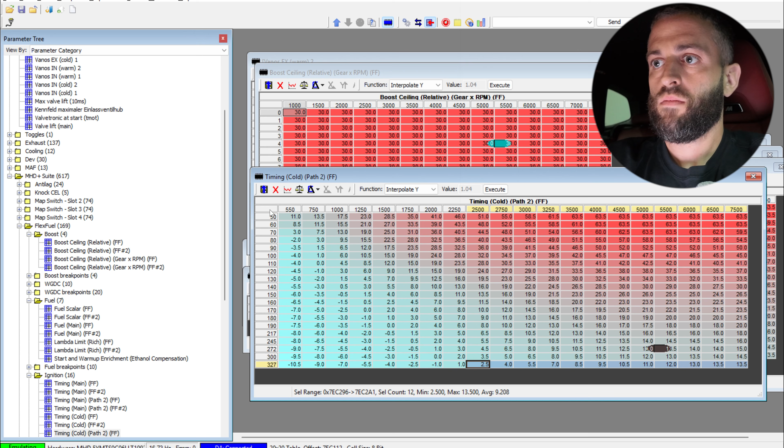So just to show you guys how this works with no changes to my current tune, right, so we have a baseline. We can also show you guys a little bit of data log understanding in a minute, but just tuning wise, it makes 710 wheel horsepower, 30 pounds boost, 679 wheel torque. While the car's slowing down, I lost one of my lights. Normally going in one of these cars, like, okay, I'm at 210 load and I'm dropping to 180, right?

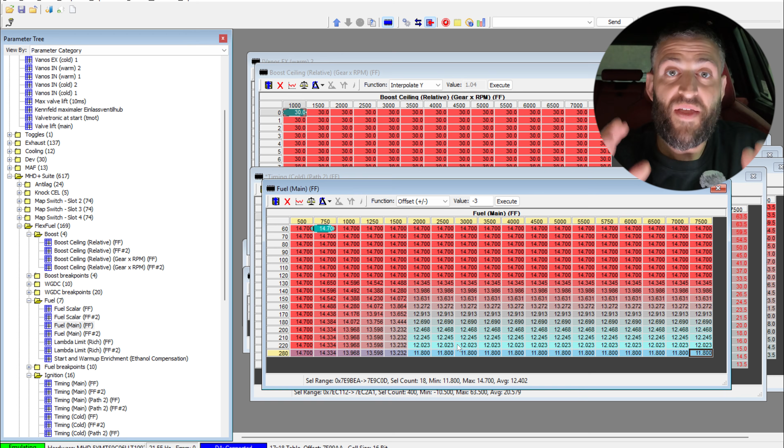For example, we're gonna take this whole table and pull 3 degrees of timing out, right? This is ignition timing, we're starting here. I know the fueling's good, I'll show you the fueling target though. I guess this car runs about 12 air fuel in this range. At higher horsepower, it goes to 11s air fuel wise. Most people will say it's too rich for direct injection motors, but fueling wise, on high boost has to be about 25 pounds boost on 85.

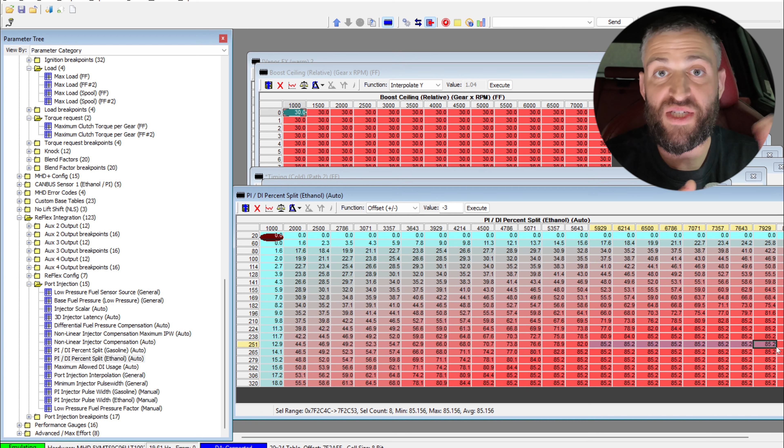85% of my fueling on high RPM is port injection only. This car from the factory has port injection and direct injection. We're gonna start off by saying if you're direct injection only, you run a hair leaner, low 12s. If you're port injection and direct injection on this engine or any BMW engine, you have to run the car very rich. There will be people that dispute me, and none of them have records like 7-second G80s and stuff like that. Anyone that runs these cars lean with port and direct injection is asking for a failure.

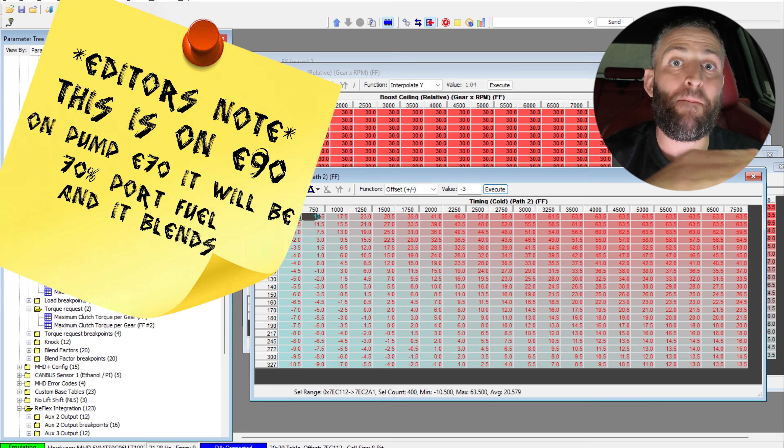With that note, I run 85% of my fueling on port injection over about this power level. My fuel target is 11.8 air fuel at about 800 horsepower on, below that it's about 12s, right? And I stopped the scaling of my tables at about 800 wheel horsepower for fueling target because I'm targeting the same thing. My G80 runs about 11.5 air fuel, 11.3 air fuel at about 1000, 1100, 1200, and I go a hair richer past that. So the fueling, that's what I run.

In terms of how to adjust the fueling, it's a whole other discussion. Ignition timing wise though, we're gonna take the base timing table I just ran, we're gonna pull 3 degrees of timing out. I'm gonna copy and paste it, and I'm gonna show you guys why MHD is king. I can adjust these tables in real time.

As I rev this car, it shows you where you are on the table. Showing you where you are is not that important if you have a matching data log, but for your guys' sake and me showing you how to tune is amazing. If you're on the street and you're trying to do this, you can't see ignition timing versus horsepower or cam timing, which I'll show you with a crazier concept, but I'm on a dyno, so I'm gonna show you guys pulling 3 degrees of timing out should lose power before I even do a dyno pull.

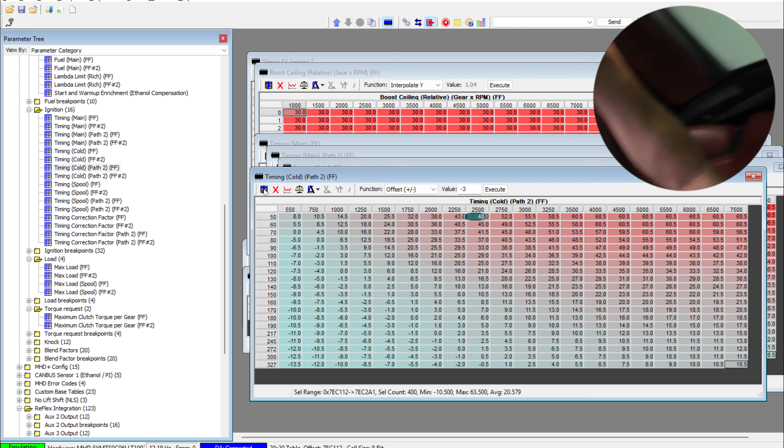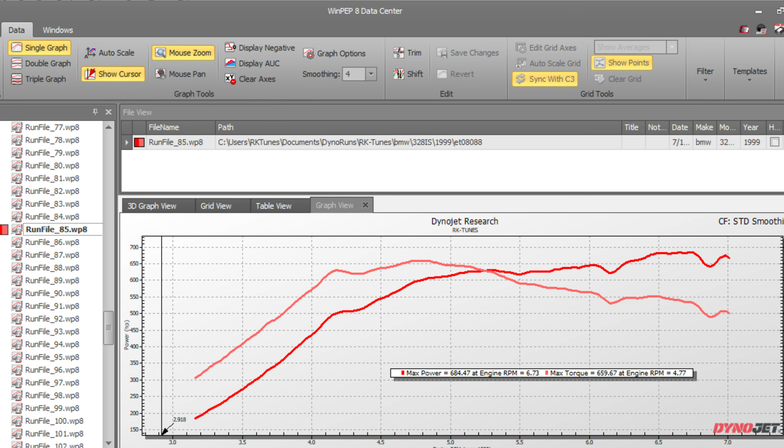Something to notice to make sure your data log's doing what you want: if you try adding 2 degrees and the data log shows the same base timing and nothing else going on, you could have other issues in your tuning. Mine's sorted though, so everything I tell it to do, it does. Spicy with the port injection. Up top, I lost about 30 horsepower, which is about what you want for 3 degrees.

Just for reference, this might sound a little sketchy, but we're at low boost. We're gonna add the 3 degrees back into the table, and we're gonna add 2 more. Someone watching this might say, just add 5. You're right, I should've just added 5, but it's okay, because then we're gonna paste it here, and just for reference, it's about 5. I should be pasting and hitting upload.

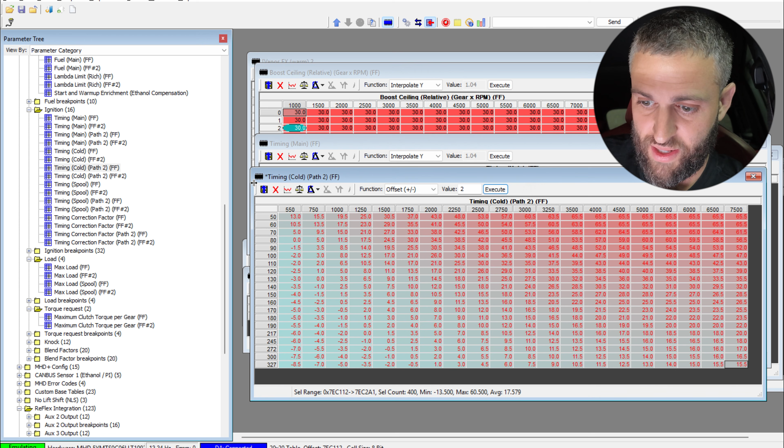I don't know why I don't, but whatever, upload. And this is live, guys, this is a brand new car with live tuning. It's crazy. If you're a DIY guy, this will let you advance so much more quickly because you can just try things. Normally each flash takes about 10-15 minutes, and MHD says it takes 30 seconds. It does, but emailing from my laptop to my phone, flashing, etc. I need to let the car warm up every single hit normally. I really don't have to. It's 95 degrees in this room, and you'd still normally have to let it warm up every time you flash. I get just 2 hits.

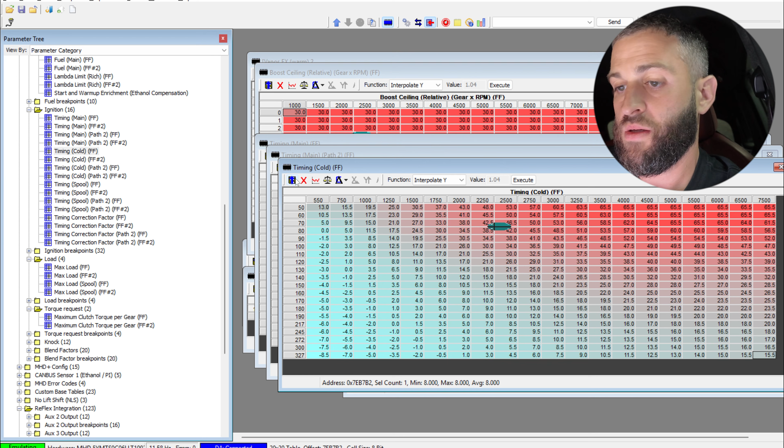This is plus 2 degrees. I'm not scared because I'm a soft tuner. I make 1,000 horsepower being soft, but I make sure the setup's good. It'd probably make like 5, 8 on the wheels. I'm so good, it made 714 wheel horsepower. It made 5 wheel horsepower, 10 wheel torque gain.

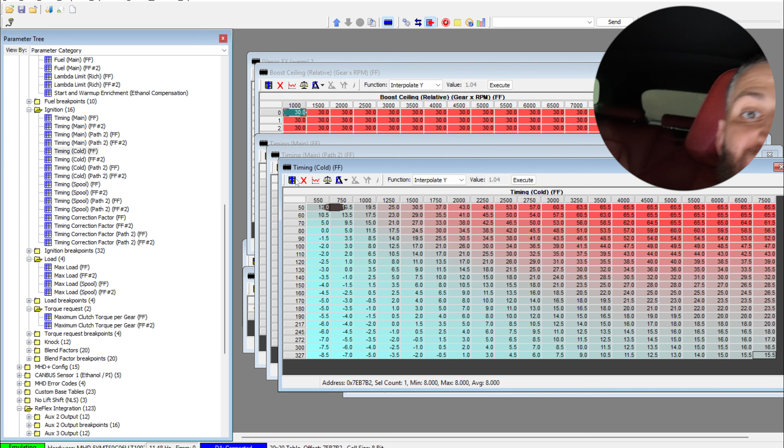A lot of people would say keep going, keep going till it stops making power. The way ignition timing works, there's gonna be really good tuners watching saying, Jordan, you're plus 3 degrees, that's a little too much timing. We'll get there. Every degree of timing should be worth a substantial amount of power. If you pull 1 degree, you lose 10, pull another degree, lose 10, pull another degree, lose 10 - it's normal.

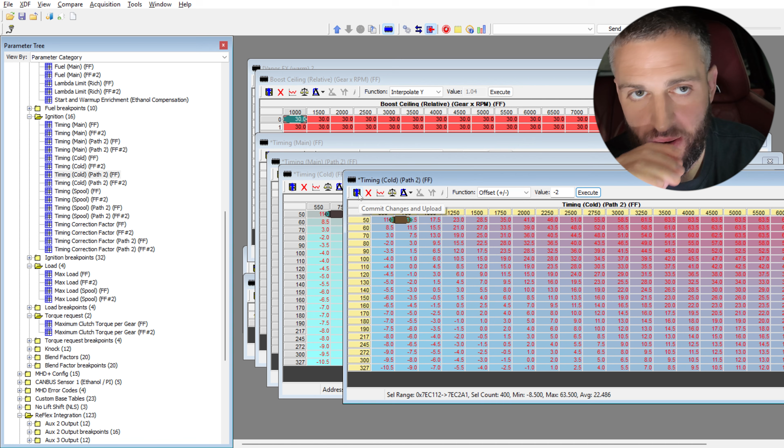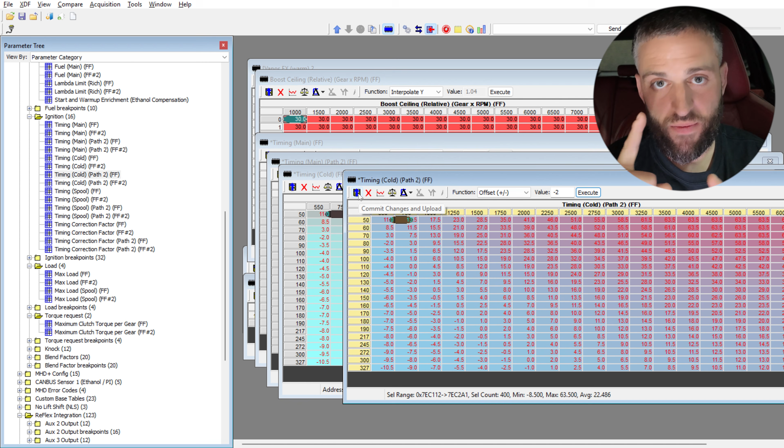Add 2 degrees timing, you gain 20 horsepower. When you gain only 5 horsepower, then you gain 3 horsepower, then you gain 0 horsepower, it's actually not that you're closer to what's called max brake torque. What it typically means is that when you gain 10 horsepower per degree, let's say, and you do it again, you only gain 5 - what that actually means is that half the cylinders lost power and half gained.

Then you do it again, and you'll actually potentially have 1 or 2 cylinders gain. Let's say 2 cylinders gain and 4 cylinders lose. Do it again, and you'll have all cylinders at an even point. So what happens is that's actually a huge negative. You should add timing until you have diminishing gains - so you're losing, or you stop gaining as much.

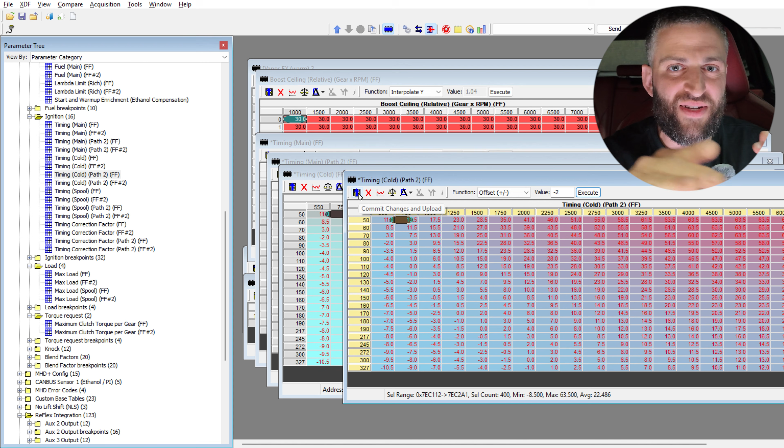Here, the reality is I probably should leave it between the 684 and the 710, probably, not exactly this. And I will make a note of it on my phone where I make all my notes. I usually transfer to my computer after, and I have great notes for people, but because I'm screen recording, I'm not gonna do it right here. I'll review that data log.

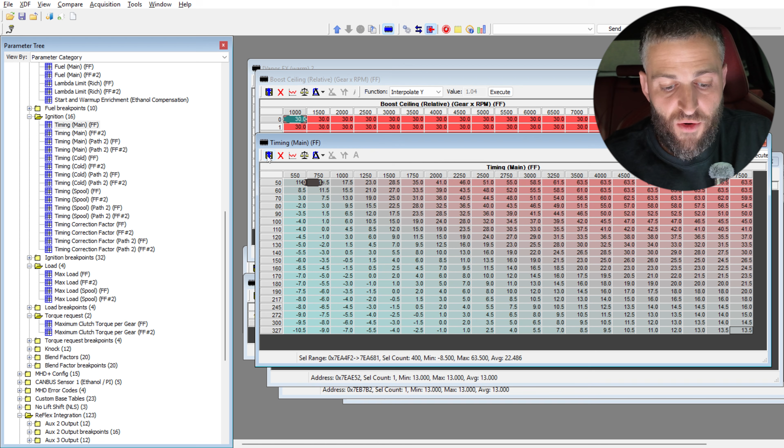You remote tune the car on the street, and your tuner adds more and more timing until I don't know where the hell they stop. So you have stock G80 M3s running 20 degrees timing, 18 degrees timing. I find 15-ish degrees the maximum safe point. You might have another tuner that makes 20 horsepower more than me at the expense of your engine at some point.

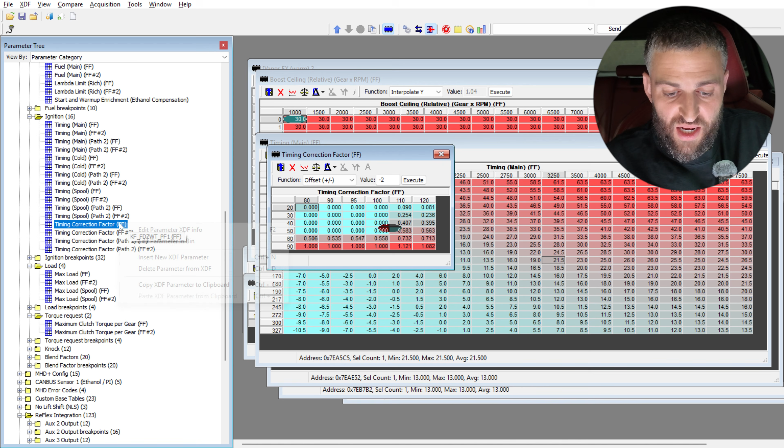That's a basic breakdown of ignition timing and how I do it. There's also compensations, which I'll show and share with you guys. If you see right here, the axis is intake air temp on the left-hand side, and the top right here is coolant temperature. So this actually means that in this coolant temperature range, the car is gonna start pulling power. I'm pretty sure, don't call me dumb, but I think it's like a multiplication on this versus something like this, and at a 1, it will pull that amount.

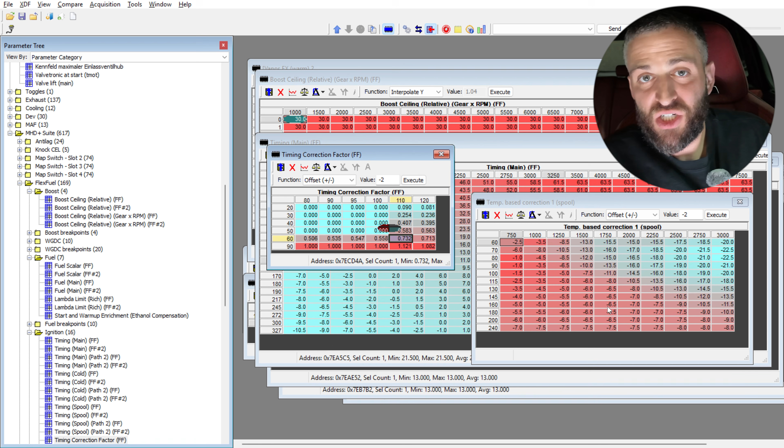I'm not 1000% sure. I leave the factory super soft with this, so I'll typically make it 0 where I don't want it to pull any power out or ignition timing, and I go right to stock values within about 10 degrees coolant temp wise and about 10 degrees air temp wise. I'm okay with it if it gets too hot, pulling out a bunch of power. Right now it's gonna pull a hair, but it's 92 degrees in the dyno room. The air temp of the last dyno pull was 120 degrees. So timing wise, that's how I do it.

What I'll typically do is, let's just say, it's a bad example. Let's just say this row is 20 pounds of boost. It's pretty close. I'll actually go to this row, which I'll show on the screen, and I'll do this at a lower power level, and then I'll guesstimate all the way up. So I'll do the math like 20 pounds boost, and there used to be things online that say 1 pound is 1 degree. It's not possible, because if that was the case I'd be running like 0 degrees.

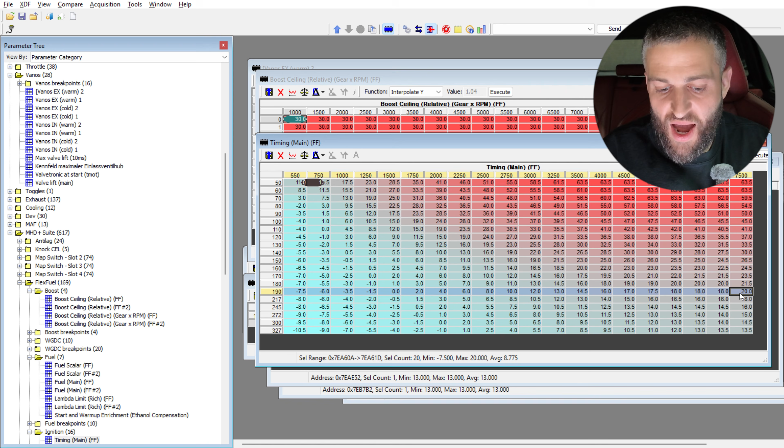I actually go from 20 to about 50. I'll pull out about 8 degrees of timing, let's just say 7 degrees of timing. That's just my math, it's a curve thing, it's not a straight line. I'm happy there, I tested at 40, I will go to 50. I never will add more based on my guesstimate.

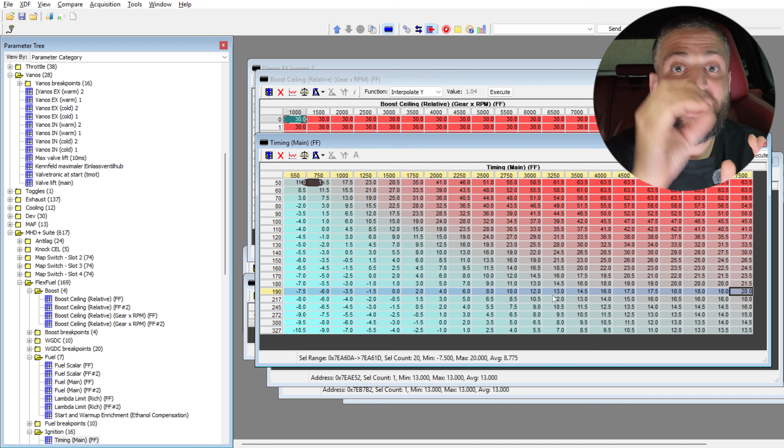I'll always subtract. So if I subtract, I see 10 down, I'm pretty happy, because if I do the math at 30 degrees, I do the math at 40 degrees, and I learned this: if I'm at 50 degrees, the chance of me needing more timing than expected is very low. I could actually potentially need a hair less. If I pull out a degree or two and I lose 0 horsepower, I'm fucked. I'm way past MBT. I fucked up, I'm gonna keep going down.

Doing this over enough time, I learn a safe window, and when I remote tune someone's car, I'll start 2 degrees, 3 degrees less than that, and that's sort of where they'll live at forever, unless I throw it on a dyno and add that back in for them. That's my idea on ignition timing.

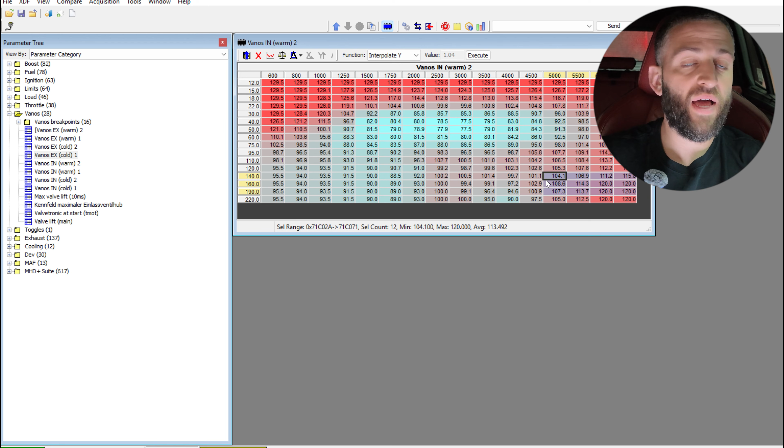It's actually the next day. Right now I'm playing with cam timing. Normally on a Chevy, you gotta take the whole motor apart. On a JZ, you have a cam bolt. On this engine, there are settings to change, and with MHD it is live. As you can see, we are data tracing, so I'm gonna show you guys exactly what does what.

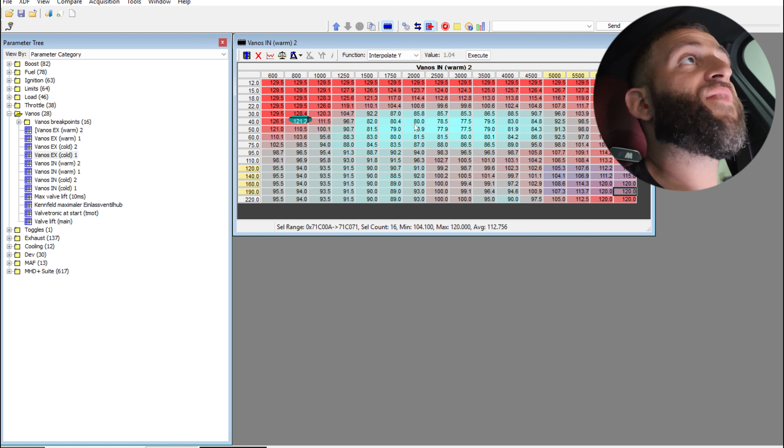Factory is about 112 degrees at redline on the intake cam. This setting right now I have is 120. I don't think this is gonna help with power, but we're gonna see. And then I just hit low boost, this 30 pounds boost, and we're gonna compare to the dyno sheet. We're not gonna look at the data log, other than I'm gonna verify the cams are moving correctly. If you're on pump gas, you could have different ignition timing being pulled, but we're on low boost, 30 pounds. With 85, the car pulls no timing, so it's not an issue.

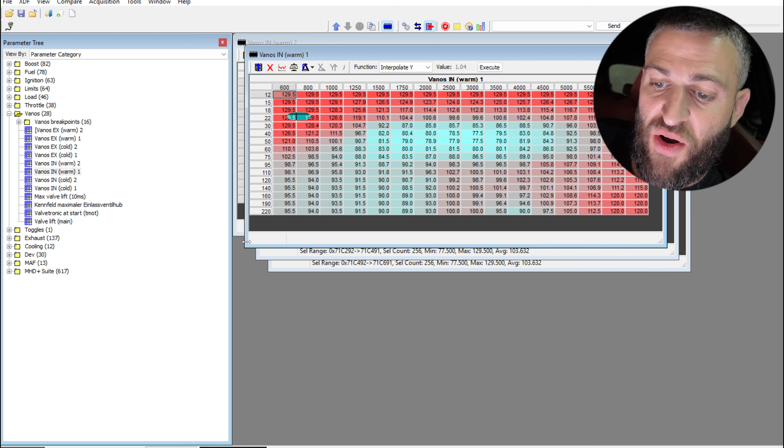736 horsepower. But to stock, we're gonna go back to stock for all the cam timing tables and see what it does. There's a problem with excessive heat, like I was dealing with yesterday, which was kind of why I quit, and I'm back at it right now. If your air temp goes up like 15 degrees or something, you might lose power when you actually did something beneficial and made the engine perform better.

So these are all stock. It's about 113 degrees at 6,000 RPMs. Quite interesting, 120 degrees up top made the most amount of power. That is extremely common on S54 cars and similar, where you have a great flowing cylinder head and good cams. It's not as common, I would say, on an engine like this.

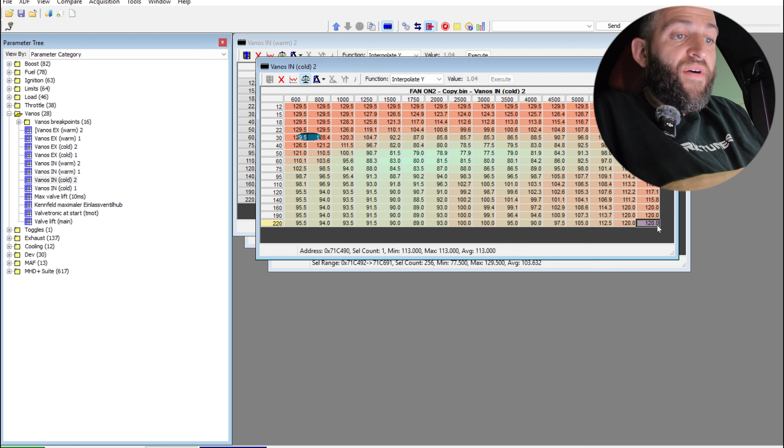To verify these gains, first we're gonna take this down. We're at 113 degrees up top, and we're gonna make it 105, then we're gonna blend this down. This is gonna have large power losses up top because it's going too far, okay? We'll just copy this over to the other tables. Upload. And I know I'm changing the values in the low RPM range, if anyone knows what's going on, and it can have misleading effects or whatever, but 99.

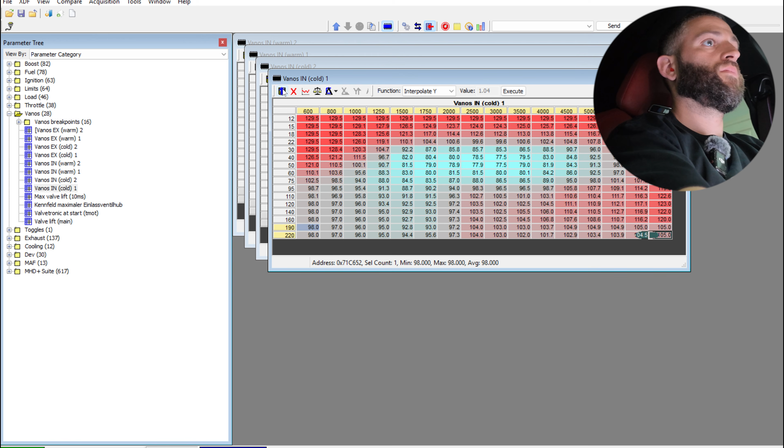And it made even less power. So we're gonna put it back to 120 degrees at redline, which I did not expect at all. I thought it would be in the stockish range, and you learn some things on some cars. I don't know if the compression of the engine has a slight difference as it works.

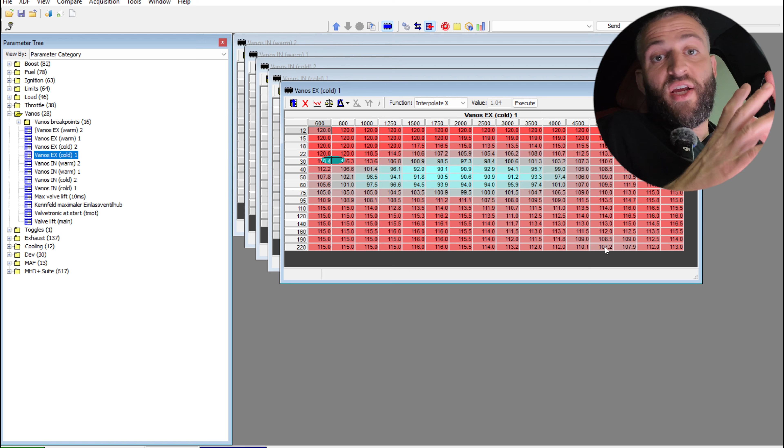Now, once we have the intake set up, the exhaust cam doesn't need as big of a split. Like this, in my opinion, this 107 on the exhaust cam is actually not needed. I think this can actually be made probably like 113 flat. And we'll do 114, and we'll try now on the exhaust cam doing the same thing. There might be someone out there smarter than me, better than me, that can tell me no, you need to do both of them combined, etc., to see the gains it has.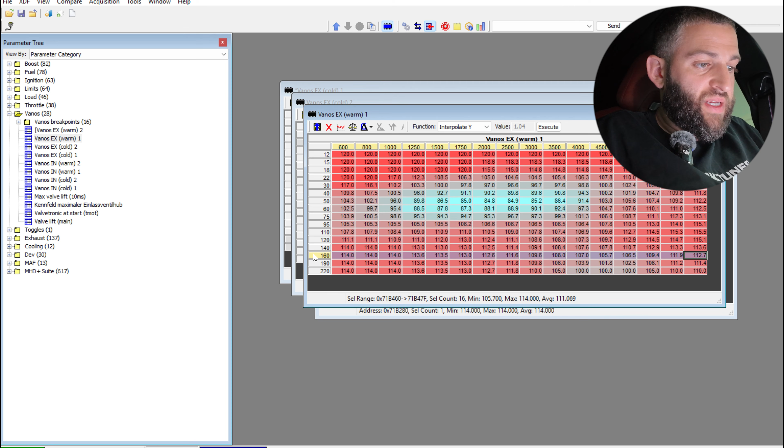The same when you shift both cams one direction, the other direction, it changes the power curve. I typically do one at a time. I've tried both independently before, and I've never seen a major gain from it. But what we will do is make the exhaust cam 113 flat, okay, and see what that does. Then we're gonna go to 105, then 120.

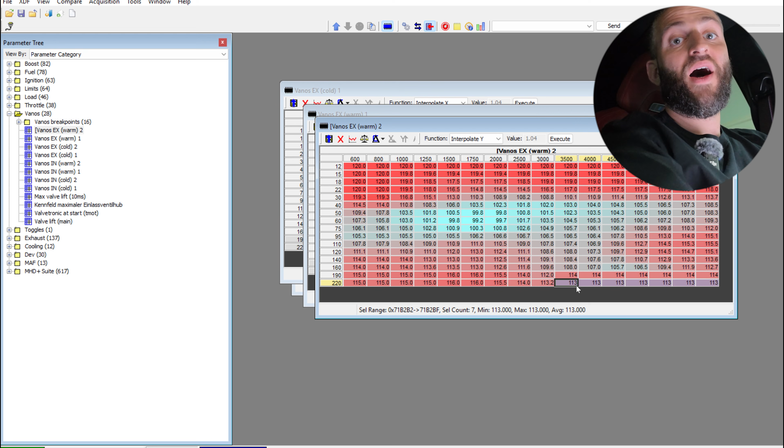The 120 exhaust cam is how people time it when you do aftermarket high pressure fuel pumps on B58s. It sucks. I could be wrong, but it's gonna suck. The intake cam makes more sense going to 120.

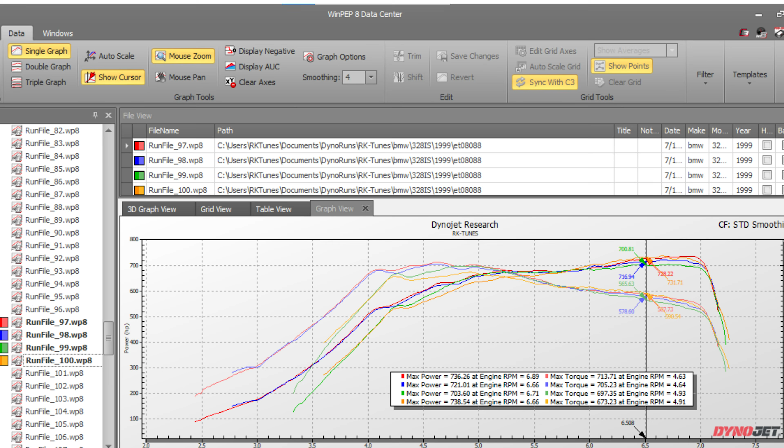That did nothing. I had small gains in this range where it went down a little bit before, and now it's flat. Now we're gonna go do, and mind you, when the car rolls up on boost, this load, it goes 0 PSI about here, and then it rolls through here. So this is really like when you're in boost. This still will have effect on spool up, and before I'm done, I'll blend all these values.

So now let's go to 107. Let's do drastic changes just to see. We'll do 3,000, hit 1, 2, 3, 4. Once again, this is not something I do in every car. I have a really good idea of where it works really good on these cars from doing it.

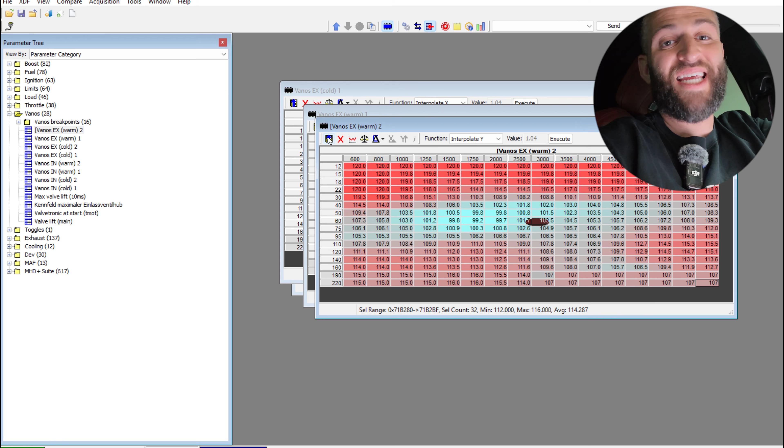Ignition timing is way more important for a dyno, because on ignition timing you can go too far and have no idea at all. The last pull for reference was 738. That actually made a little bit more power - it made 752. Cool, right? Now what we'll do is we'll actually go from this to 102 degrees.

And a 5 degree step is fucking huge, but I'd rather do this and know what's happening. Also, just for reference, that lost a bunch of power down low, but it made way more up top. So we're gonna, just for reference, go to 99, I guess, which is crazy. For me, I think it's a little crazy.

And then I'll show you guys the benefits of variable cam timing, because I can actually have it be one degree in the mid-range and a different degree up top. All right, 1, 2, 3, 4 tables, all done.

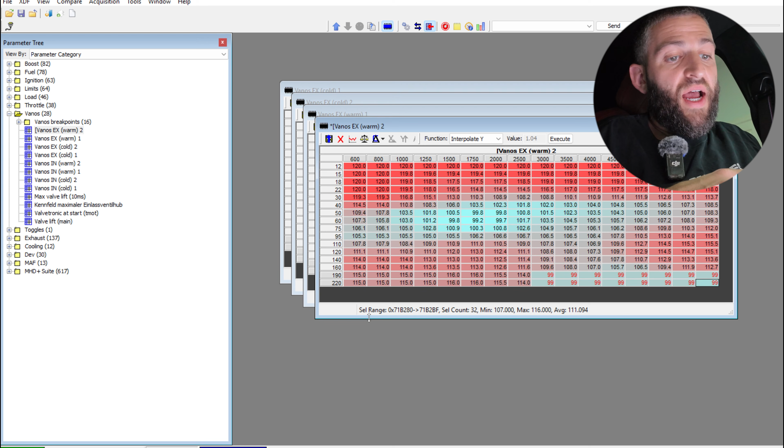Also, for MHD live tuning, for more information, I asked them if there's any information I could share with you guys to make this easier. They said read the book, the PDF. They said everything's a PDF. So even when I had problems on this, on the MHD stuff, I read the PDF and it made my life so much easier. My lighting is freaking bad, guys, I'm sorry. The lighting's horrible, but this is live tuning and how I do it.

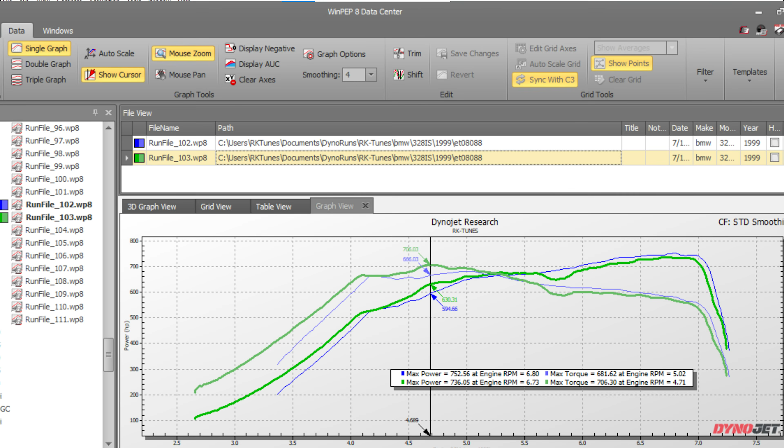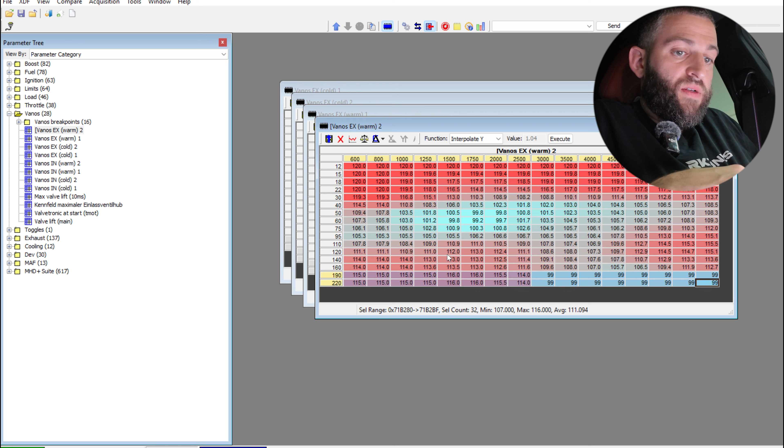Then made power past 5500, right? And we'll actually blend this down like this. Interpolate X, boom, interpolate Y. I don't really want to do that, but I guess I will.

For reference, I think this should actually be the same thing across the board, but I'm not testing extremely low power level, and it's not only gonna be like 10 pounds boost that much, so it's sort of irrelevant. Then we'll take this 120, and we'll go boom, boom, boom.

Right now I'm gonna let it cool off for a second because my air temp is very hot. So now from 5,500 RPMs on, I'm gonna have 103 degrees, and on the low end I'm gonna have less, because this is the RPM scale, right? Upload 1, 2, 3, 4.

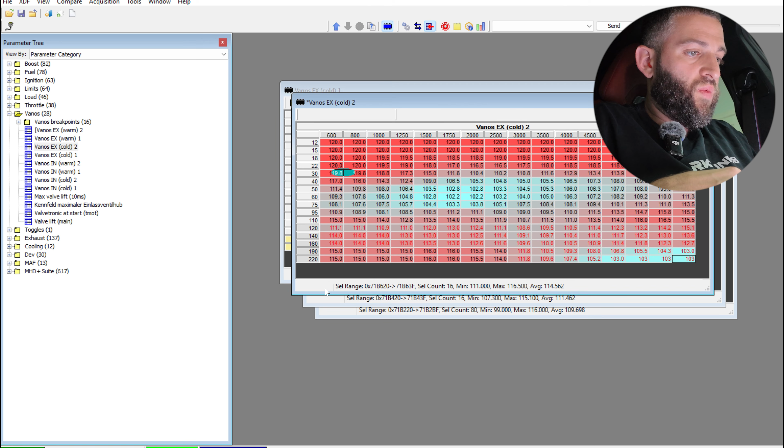And these tweaks I've just done, I don't know if you guys realize, I went from 700 wheel at 30 pounds of boost, pretty much, to 750 wheel.

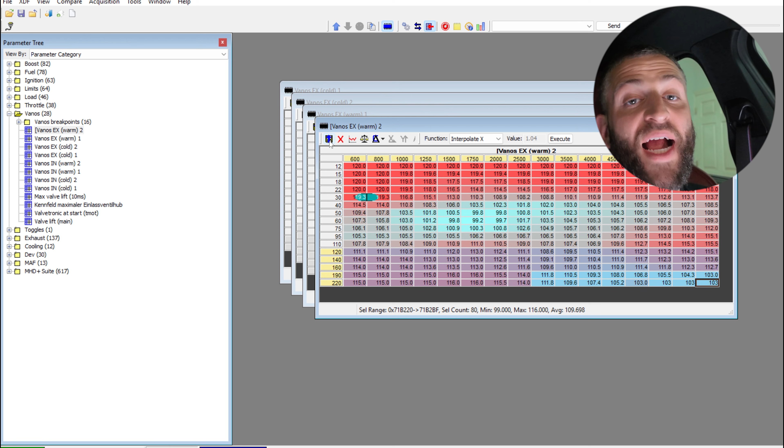People think that tuning a car, you're gonna be aggressive and run more and more ignition timing, and what I've shown you guys is I'm not. The ignition timing currently on this tune and this table is actually the lower ignition timing from me testing. I could add back in a few degrees and gain about 10 wheel, I think it was 15 wheel, and I could probably go a hair higher and find 20 wheel horsepower more at 30 pounds boost.

But in my opinion, that's the wrong way to do it - that's the aggressive way. Also, by doing cam timing tweaks like this, your changes at 20 pounds boost or 30 pounds are the same timing target, in my opinion, at 50. You have really high back pressure, it will tweak things slightly, but this is the way that I do it because I don't want to do 20 pulls at 50 pounds boost for the customer.

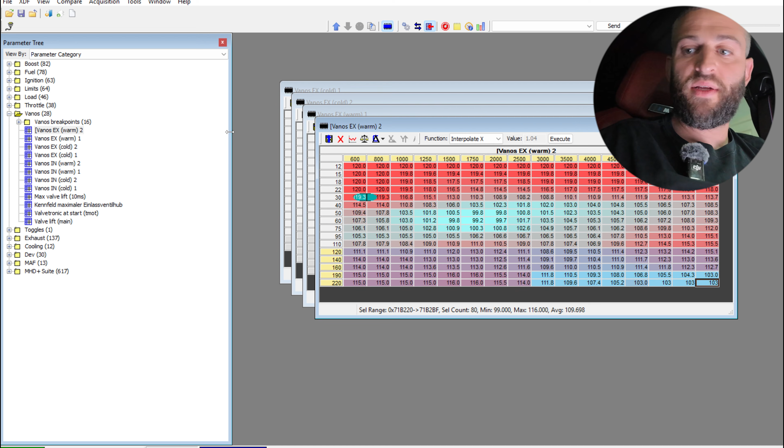Let me check my air temp real quick. Air temp's actually 108 and we're doing good, so I can keep moving now.

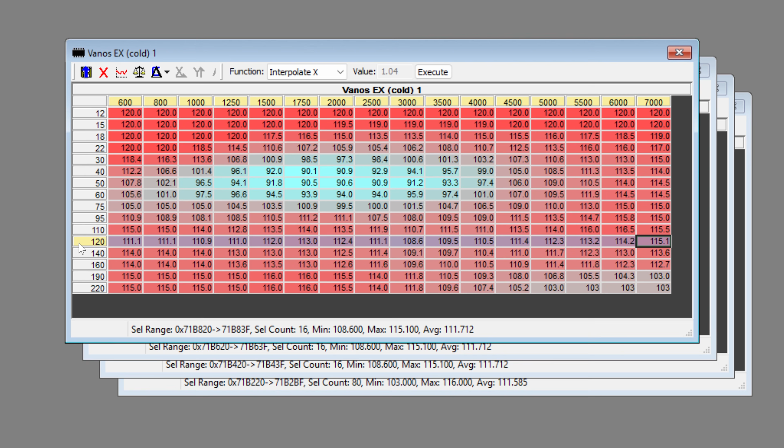So where we left off, we're doing a blend like this, right? And then we can give it a blend upwards just because, I guess, it doesn't really matter in my opinion. And we'll copy over from 120. This is how I make things look similar and correct, with a nice blend on everything. So I'm gonna blend up so that the tables are all smooth.

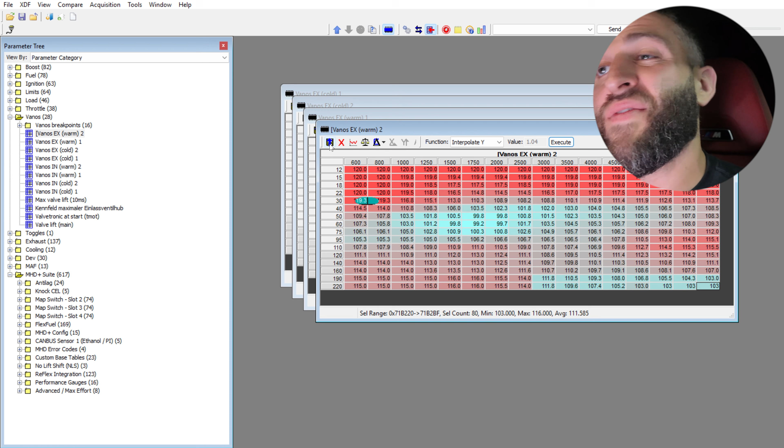I'm gonna upload every one of these to the ECU, and it's crazy how much space there is. You could probably fully tune a car live and then save it, flash it, and give the customer files after. I do flash randomly in between when I do this because I'll shut the car off, take a break, disconnect, and I want to reconnect with everything matching every time. So if I take large breaks in between, I do end up reflashing the car in between, which is whatever.

Okay, so now in theory, this should make 750 wheel horsepower and fix the torque down low, because if you look at the last run, the torque was shitty. I don't know if you guys are gonna see every single dyno sheet, but I hope you do, because pretty cool, pretty good stuff.

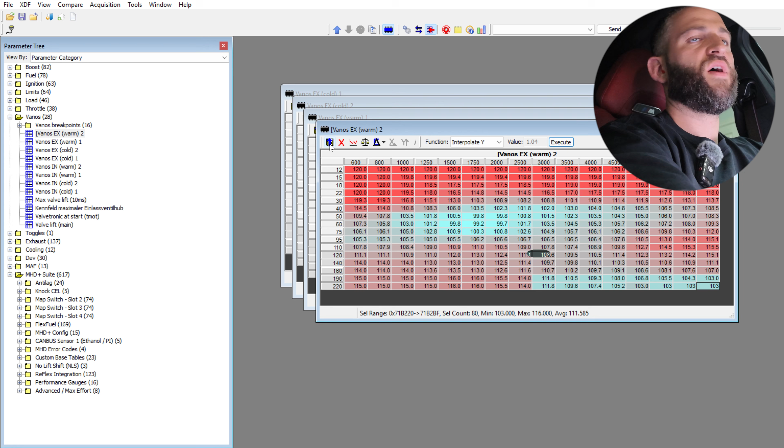I also want to do a video on exhaust stuff, like how Y-pipes and X-pipes suck, and how it all performs based on tons of testing I've done over the past many years of my life.

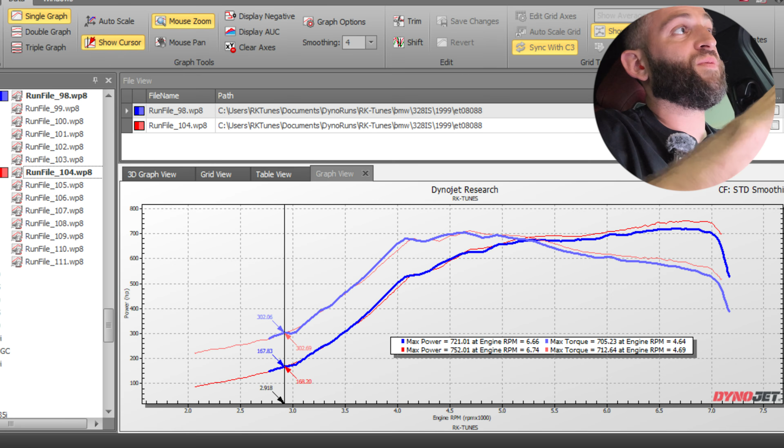As expected, I have the torque down low, right? I have 752 wheel horsepower up top, which is identical to 3 pulls ago. This is the before and after dyno sheet for all my cam testing today. If you look at this, it's 30 horsepower peak and 40 horsepower at redline. I think that's fucking amazing. How about you?

Now that this is all good, right? Well, we're done with cam timing. There's more you can do with cam timing, and you can also build into this area. Like if you guys saw my floor, it goes like 100 and then ramps up when boost hits. You can build this into an anti-lag type of thing. It works great for launching off the line to create a lot of energy or exhaust gas flow.

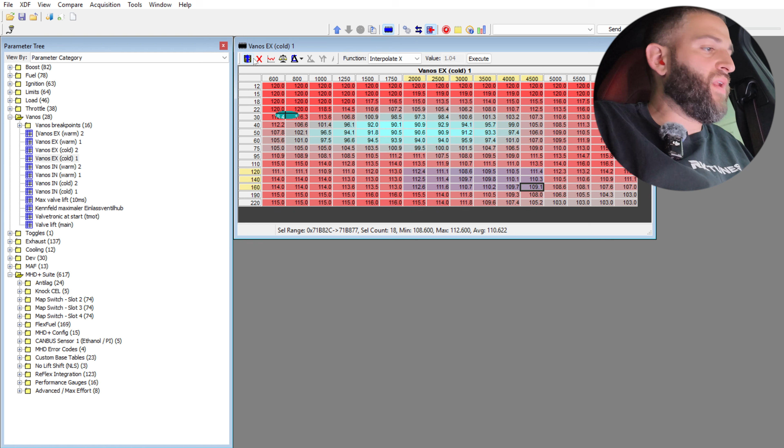I don't like it though, because I feel like when you data log over time, it actually makes the pull longer. So your 4,000-3,000 goes, wah, and then it gets into boost and leaves. So for a drag racing thing, fine. For a normal street car, not fine. So I do not build any crazy anti-lag or spooling-off cam timing into my tunes.

I don't like it. This car makes 690 wheel torque at 4,000 RPMs at 30 pounds boost, so I think that's fine. This is also not using any of the OEM logic for boost control. It's using 100% of MHD's features for logic, and it does have boost by gear, and I will show you guys in a minute. So this right now makes 700 wheel torque, which is fine.

If this was, for example, a stock engine, and you wanted like 40 pounds of boost up top, and then at peak torque at 4,500 RPMs you wanted to blend down, I would do something like this, right? Which is 30 pounds, ramping to 40 pounds up top, which is a built engine. So we're gonna get rid of this. This is a reference to show you guys how I do stock engine stuff.

For reference, it made a hair more in the mid-range than I would typically like for a stock engine car, but that's down around 105. It made 866 wheel horsepower and 745 wheel torque. It made a little bit too much torque at about 5,000 RPMs or less.

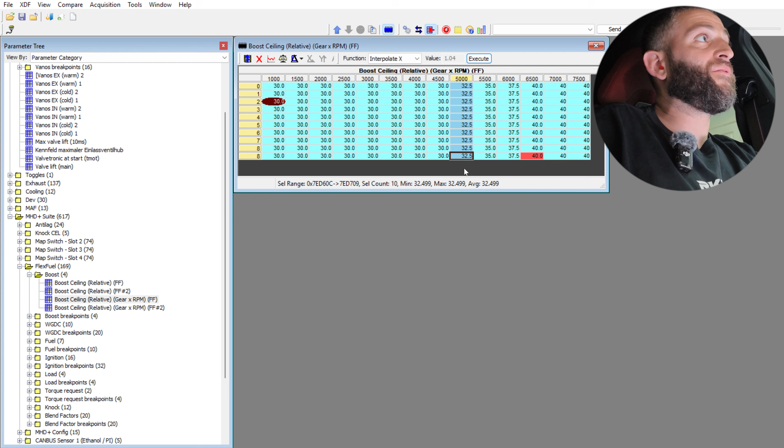So at 5,000 RPMs I would actually take it back down to 30. And this seemed like a weird step from 5,000 to 5,500. It will actually be probably pretty smooth on the thing. And then here, where we're at 40 pounds boost at 6,500 RPMs on.

Not gonna lie, my dyno monitor is definitely broken, so it sort of sucks to see from here. At 6,500, okay, it's okay. At 7,000, it could take more — you'll make like 900, 950 wheel on a stock engine, which is pretty fine nowadays. But that's just for reference, right?

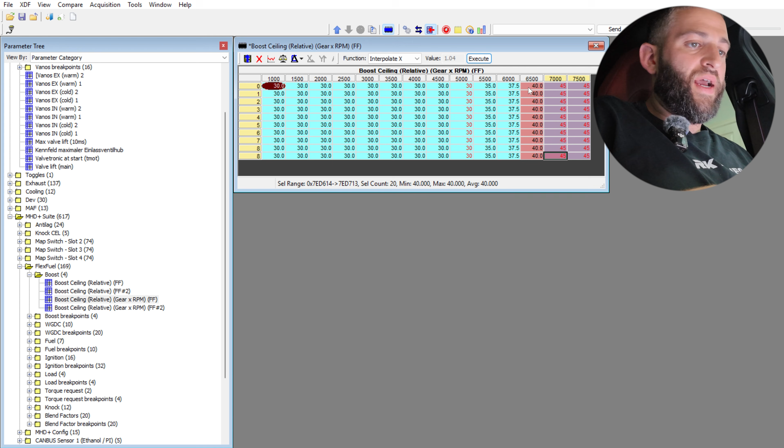This is a built engine, so we're not gonna spend a ton of time doing this. I guess I'll do one more just to show you guys, like 45 PSI. I don't think it'll get up to 45 PSI in this time frame. I think it's a little bit too slow of a ramp.

So I think at 5,500, probably fine on that. At 6,000, I think this is an okay test. It's crazy to do this live — this would take me so many hours normally in my life. And that made 896 wheel horsepower, 713 torque. I fixed a torque dip.

And then what you'd want to do again, as mentioned previously, is you'd always go back into the load, check your data log, and make this table maybe 5% higher. That way you have a window of safety for throttle closures and stuff, so it doesn't overboost and doesn't throttle close. On this last data log, the throttle did close a tiny bit, to be honest with you. It's okay, I'm not that worried. I'd pull out a little bit of base wastegate duty cycle, but this car will never do this, so I'm not that worried, because when maintaining stable, it's not a problem.

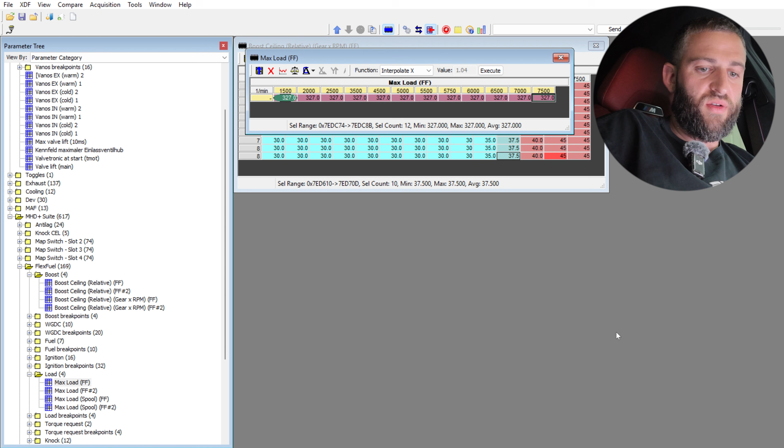So it closed a little bit, but what am I gonna do? It closed like 15% at one point, and it also only went to 35 pounds up top.

Sometimes if it can't hit boost target, what I'll actually do is I'll run a fatter boost curve, like this, I'll make 33 or 34. Because to get from 30 to 45 pounds in 1500 RPMs is sort of impossible. This is only hitting 37, 38 up top, so I'll actually make this 35. I'll leave this ramp the same.

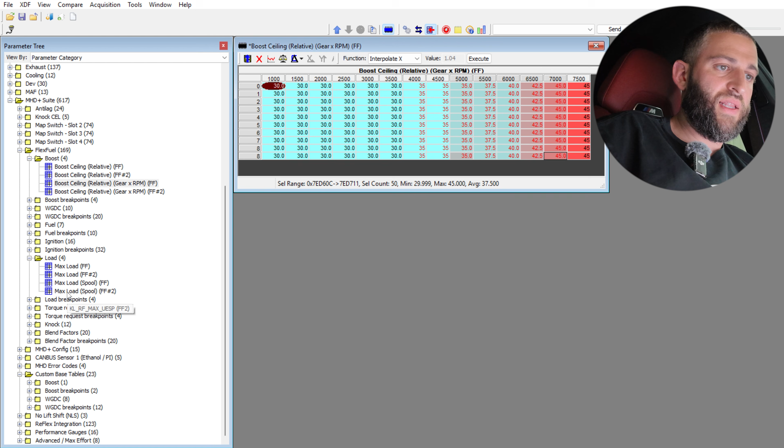And then I'd go to the ignition timing tables. I'm teaching you guys all the good stuff. I'd go to the area in which I don't want to blow it up, and I'd pull out like 7 degrees or something insane. Boom, I make the area and boost minus 7 degrees. I'd blend up, blend that way, blend this way. It builds more heat by doing that. So boost control is always my first method, always.

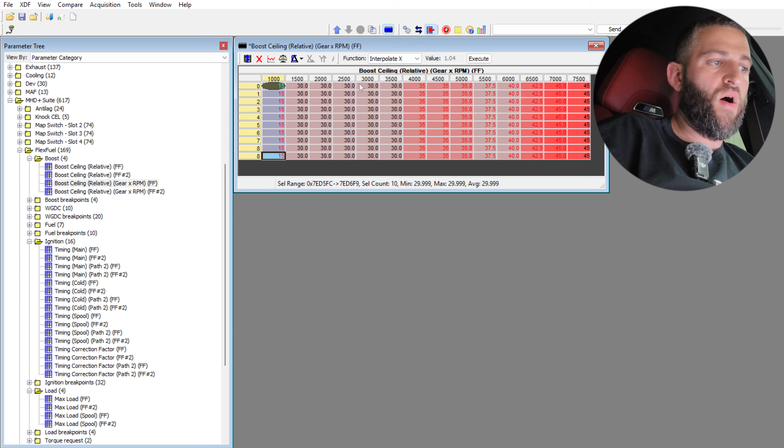And also, like, you can't hit this here. So even if you built this, okay, at 3000 RPMs, the most boost I'm making is nothing. I got 10 pounds by 3500, so I'd make this like 15 or 20, and I make this like 10, because it's irrelevant, I don't think it really matters. It can't hit that much there. I don't think on anti-lag or anything, I just want this a hair higher.

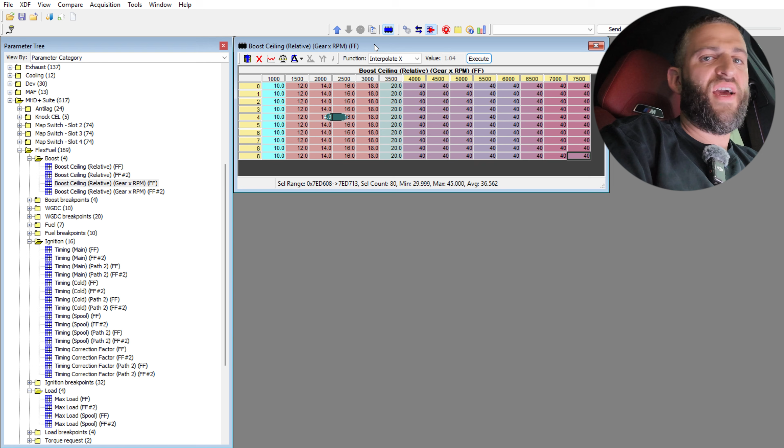Now what I do is I make this boost target. We're gonna make it up to 40 pounds just to show you guys how this car works. There's a chance that moving the cam timing has a small effect on boost. If it does and it overboosts and closes the throttle again, I will tweak the wastegate duty cycle base table that I built.

All right, flat boost, 40-pound target. It made 894, but instead of making 700 wheel torque, it made 800 wheel torque. And that's run 100. And then we'll go to 50 pounds, because I'm not no bitch.

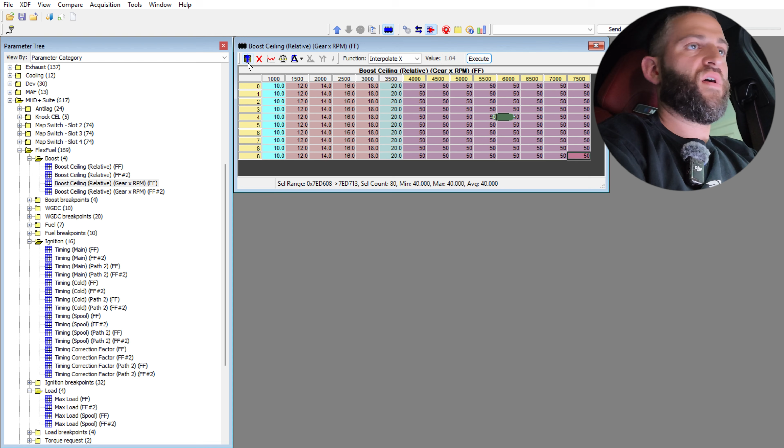All right, what's air temp? Air temp's 106, it's fine. Should make 950 or something like that. And it made 939, which is fine, we'll check the data log. Boost 48, 49 PSI, it's a hair low at one point, which I can probably fix.

And we're also gonna let it cool and run it back again, first at 50, then maybe we'll let it cool and run it again a hair higher. Because the air temp right now, the starting air temp in this room is really hot, and the air temp gets really hot, so it might make more than 950 all said and done.

If this doesn't work, I might lock it back to 120. It's an oil pressure driven system. And even though 120 loses horsepower, maybe for his high boost map I'll have it at 120. Having the cam not walk backward at 120 might make more horsepower than moving off target. But here's the outside pull.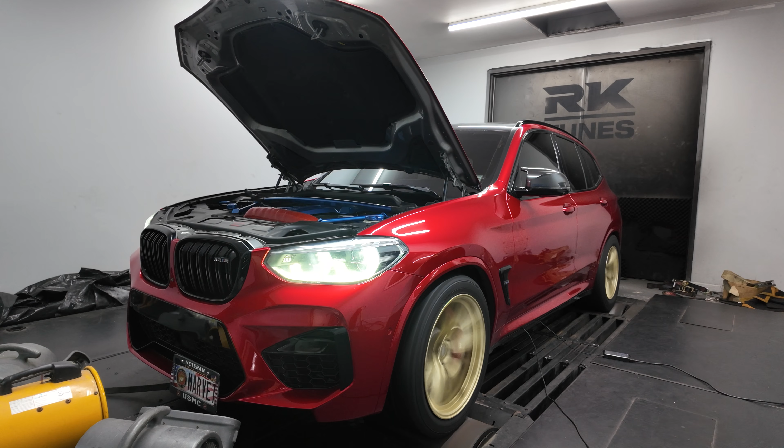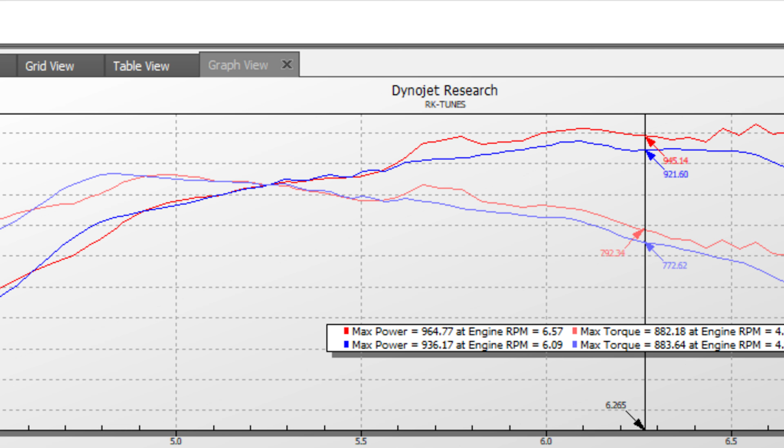First pull, 50-pound boost. Second pull, I tried targeting 55. It only hit 52 to 53, and it actually started to lose power, which I've spent a bunch of time on this car previously and never experienced. If you look right here, the red is 53, 52, and that one's 50. It lost a bunch up top.